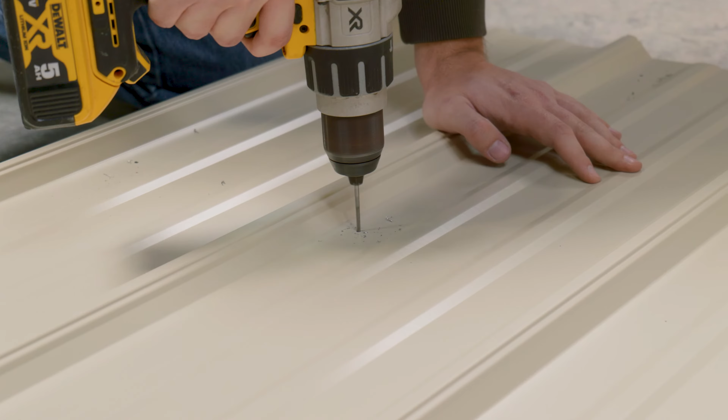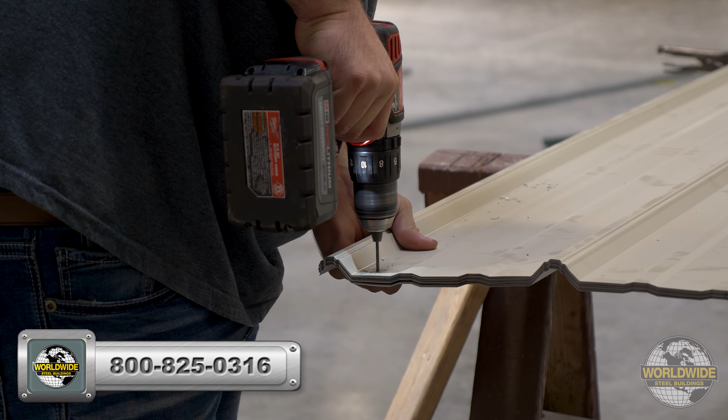Worldwide Steel Buildings recommends pre-drilling wall panels before fastening them to your building. When pre-drilling panels, we utilize a method called stack drilling. We recommend stack drilling no more than 20 panels at one time.

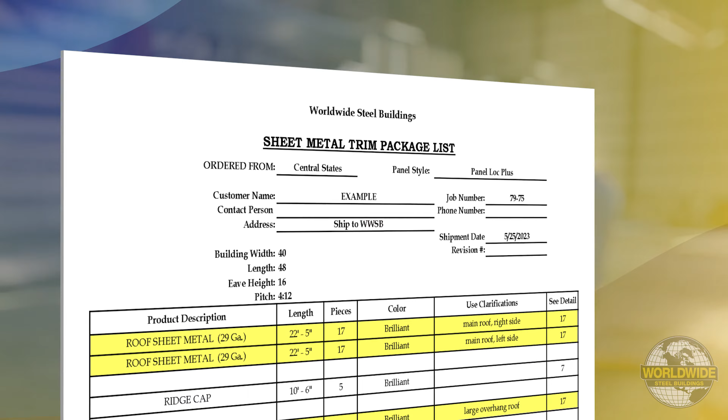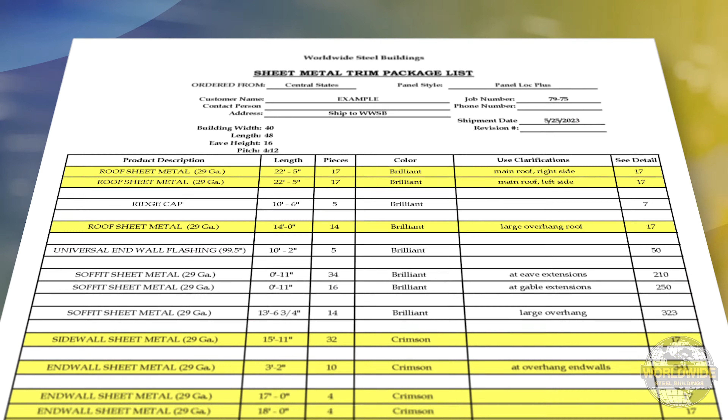First, you'll need to identify the panels that are supposed to be installed for the wall surface you're working on. Refer to the sheet metal trim package list located in your ship list. This page will indicate what panels and lengths are to be used at each surface of your building. Worldwide Steel typically bundles panels together for each surface when you're building, but it's a good idea to verify you have the correct panels before pre-drilling them for a surface.

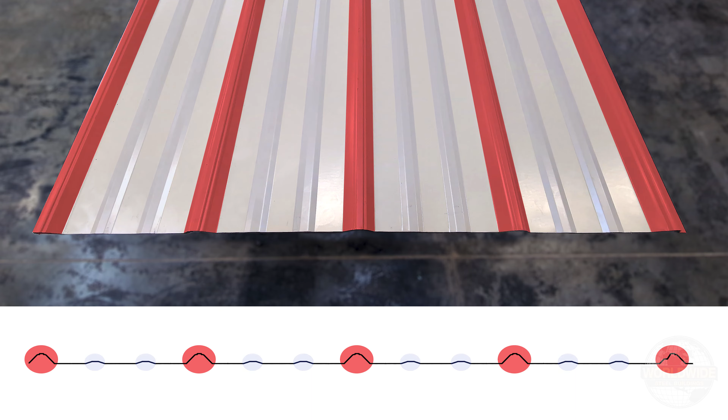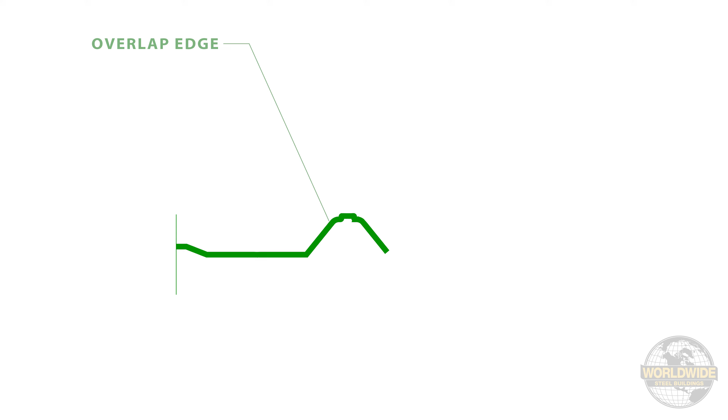Worldwide Steel's typical wall panel has a total of 5 high ribs and 8 smaller intermediate ribs. The high ribs are spaced 9 inches apart. The panel is designed to lap and has a 36-inch coverage. This is the dimension from the center of the first high rib to the center of the last high rib. One side of your panel is referred to as the overlap edge, which is the side shown here. The other side is referred to as the underlap edge, shown here.

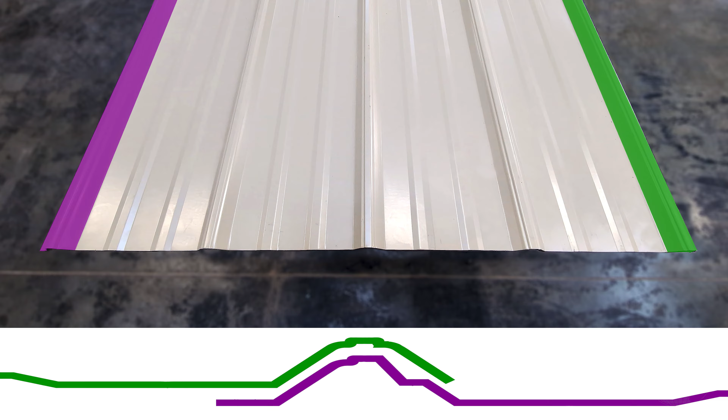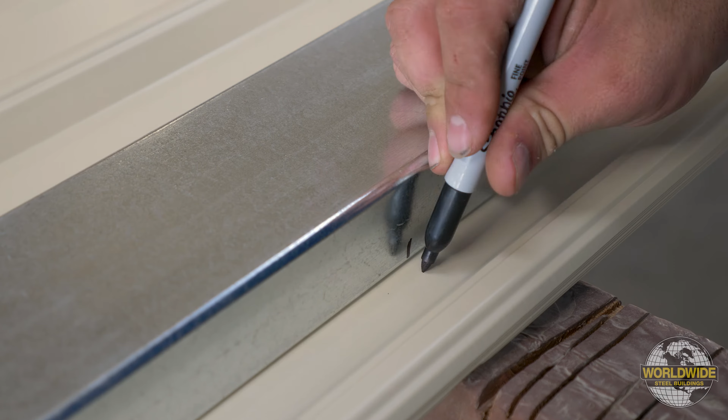When installing your panels, you may start from either the left or the right side of your wall, working your way along the distance of your wall surface. In our example, we're starting from the right side and working to the left. Therefore, the overlap edge of our panels will be positioned on the right side when stack drilling. If you elect to install from left to right, then your overlap edge will be positioned on the left side when stack drilling. It's important to correctly orient your panels before marking and drilling to ensure a proper fit.

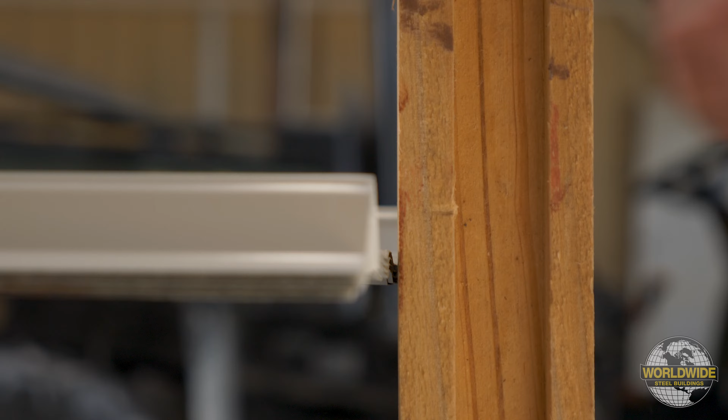It's common practice to utilize a piece of wood and hammer to ensure the ends of all the panels in the stack are lined up. Once you have the end of the panels lined up, we recommend using 2 or more locking clamps to clamp the panels together at the end you lined up to help prevent any movement during drilling.

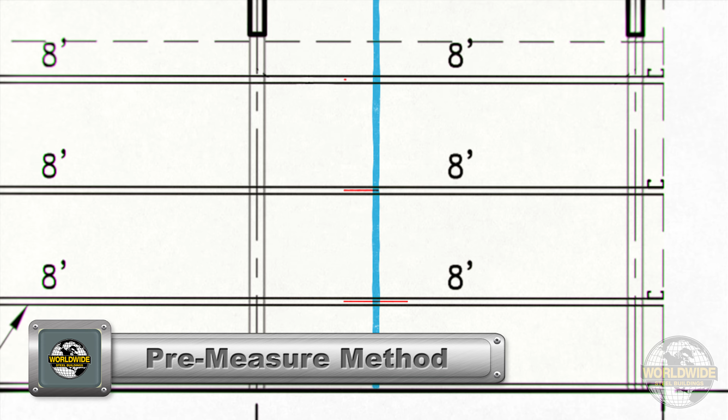There are a couple of methods we use to ensure our pre-drilled holes line up with the girts. First, for the surface you're installing, measure the distance from the top of the base trim to the middle of each girt. Keep track of these dimensions so you can transfer them over to the panels to pre-drill. Second, you can utilize an extra piece of galvanized material and place it on top of your base trim up against your girts. This is commonly referred to as a story pole.

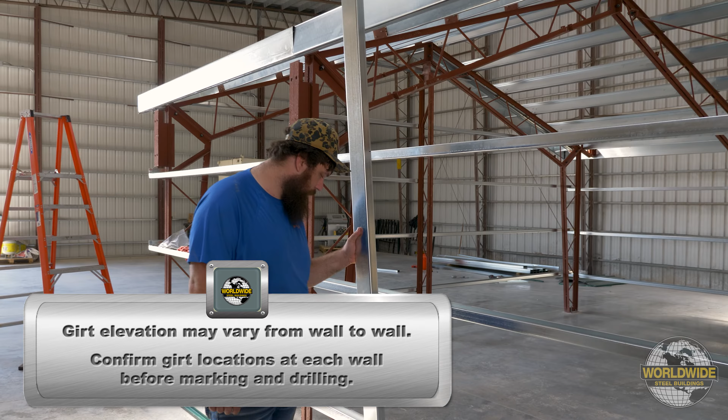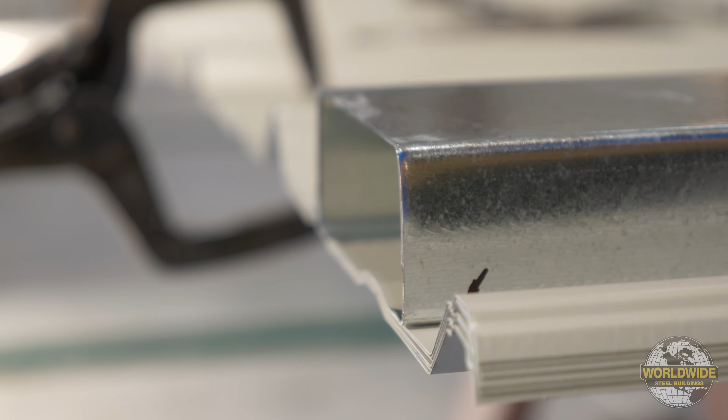You can make a mark on the galvanized piece at the center of each leg of your girt, as well as the center of the leg of the base girt, and approximately 1 inch down from the top of the eave purlin. Using a story pole eliminates the need to write down each dimension and measure for each hole you're drilling. You can then take the story pole and lay it flat on your panels with the end of the pole at the base of the panels, and use the marks on the pole to mark where you need to drill.

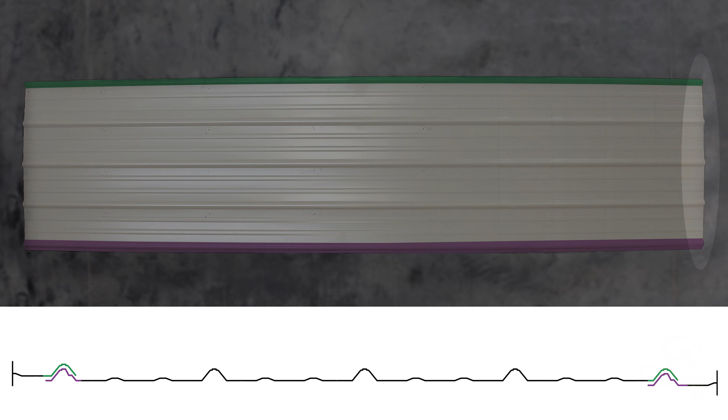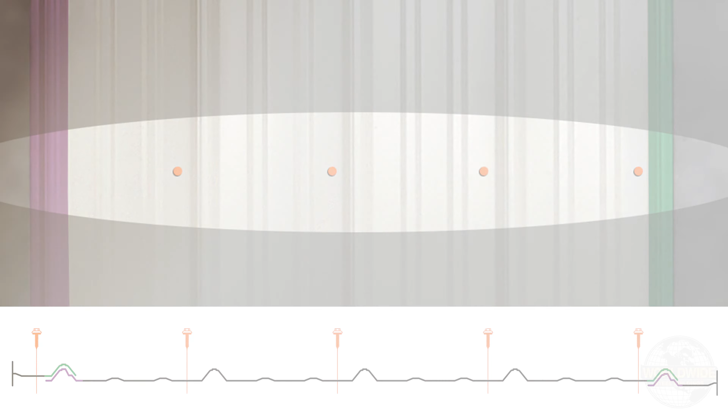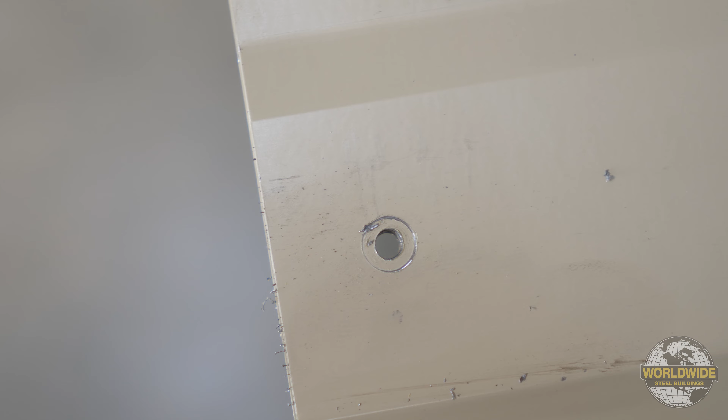When locating your holes for attachment, holes should be drilled at the base connection, the eave connection, and all girts toward the overlap side of the high ribs, and should be placed between the high rib and the first intermediate rib, as shown here. Mark each hole that will be required for your panel attachment, and then, using a 1/8 inch drill bit designed for drilling into metal, drill at each location you marked as demonstrated here. Once all the holes have been drilled, you're ready to start the installation of your panels.